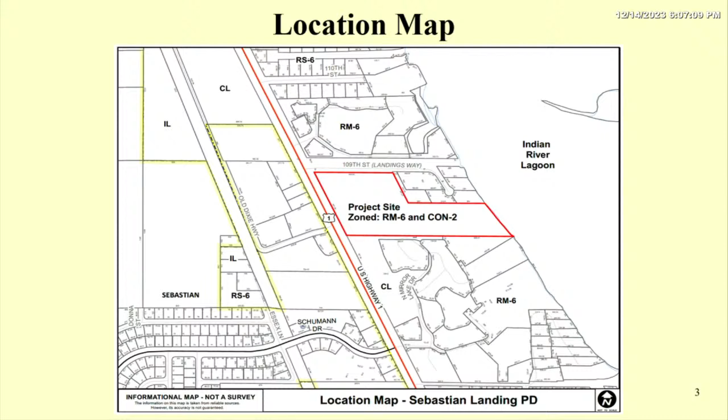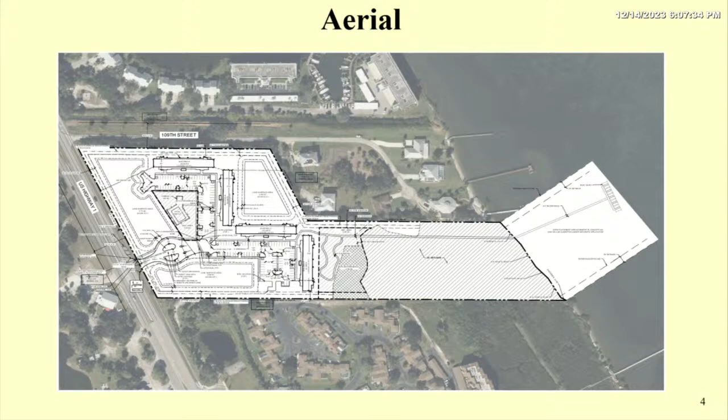The aerial map shows the site superimposed on the vacant parcel, how it integrates with existing development around all of its sides. Directly to the north is the River Run condos on the north side of 109th Street. Adjacent to the site to the north is the Dales Landing subdivision. Abutting to the south is Reflections on the River condo, and again, US 1 abuts the site to the west.

Site plan shows the site. The red boxes are the 4 buildings. Each one of these buildings is 3 stories tall. They each contain 18 units for a total of 72 units. And then the parking is all out in front of each building for access.

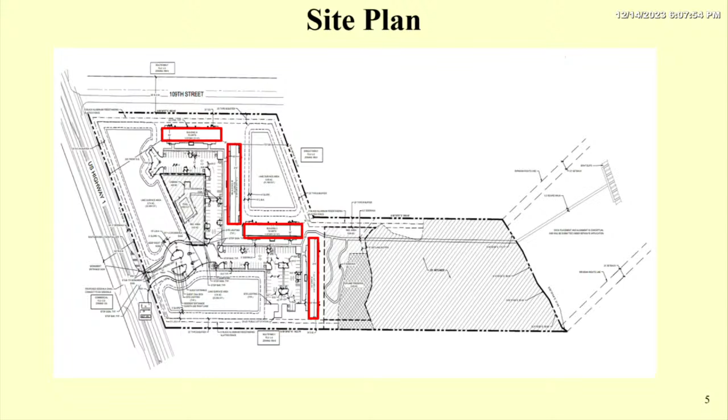Traffic circulation: when you come into the site, the residents can go straight through the center. It's going to be a gated community. They're all going to have their own codes to get in. On the very south side, or to the right, is your guest entrance. You can call in and get in. And then, of course, on the north side, that's the exit lane that all folks can go through.

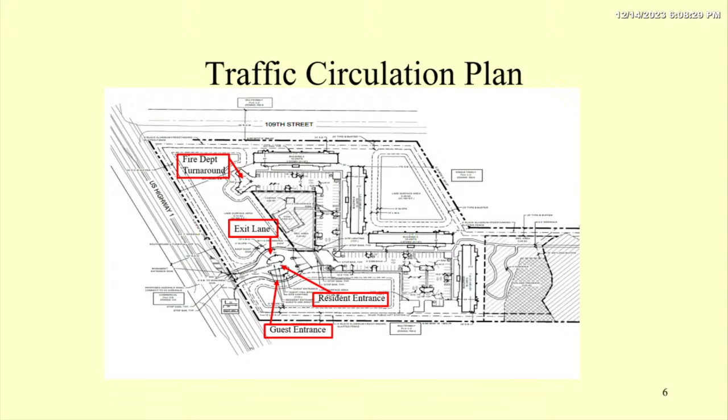To the north of the site, you'll see a little T shape. That's the fire department turnaround in case of emergency access. This is a 2-lane driveway that goes all throughout the site and circles throughout, and it meets all of the parking regulations and width requirements for maneuverability.

Stormwater plan: there are 3 interconnected ponds. You'll see them shaded in blue, connected by underground pipes. They flow to a drainage outfall that dumps into the existing wetlands. There's approximately 4.5 acres that make up that wetland basin. It will help to rehydrate it, and it'll also continue to filtrate it as it comes through.

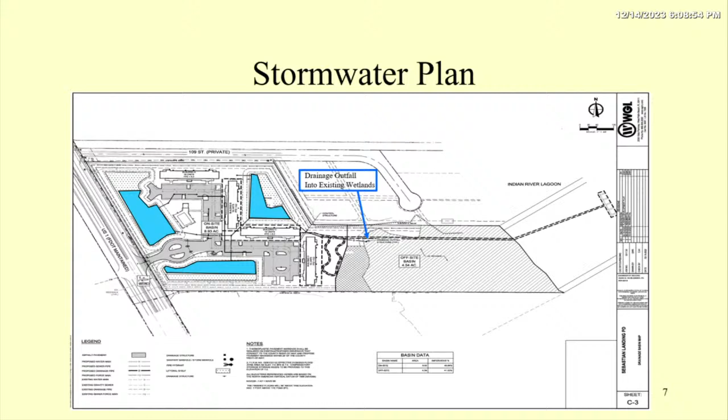The landscape plan: in green is their 25-foot type B buffer with a 6-foot opaque feature. It rings the site on the west, north, and south sides. It doesn't continue all the way because the wetlands are being left completely intact and wooded. They do have a very thick existing tree canopy. You'll see just to the west of the wetlands, that's all being kept, and there's a little pedestrian path that cuts through there. All of the ponds will have lake shoreline trees and littoral shelves within them to help filtrate nutrients.

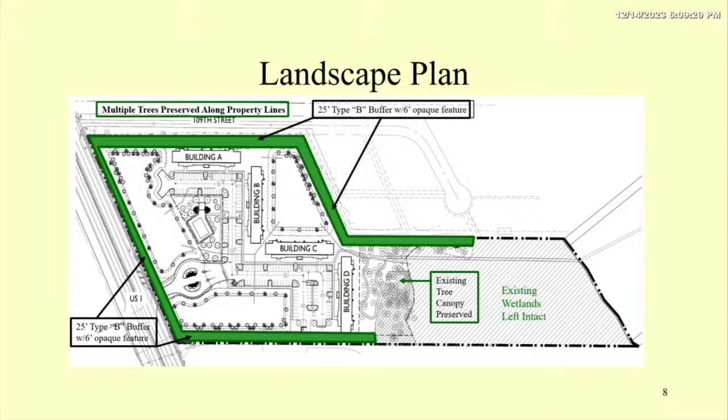With that, the staff recommendation is for PZC to approve the preliminary PD plan plat for Sebastian Landing PD with conditions listed in the staff report related to deed restrictions and/or easements required that restrict development within the environmentally sensitive areas on-site and off-site.

The purpose of this is that density has been transferred from the on-site wetland to the upland portion of the site. There's also density that's been transferred from an off-site bank of 11 acres that was transferred to this property. They will need to record either an easement or deed restrictions that restrict development on those properties. They won't be able to develop any type of residential on them because all of that density has been transferred to the upland portion of this property.

The conservation easements for on-site wetlands and uplands must be left intact. Final landscape, sidewalk, pedestrian system, and street lighting design must be approved as part of the LDP. Final tree protection and mitigation plans also must be approved by the LDP. And then the installation and construction of required improvements is also a condition.

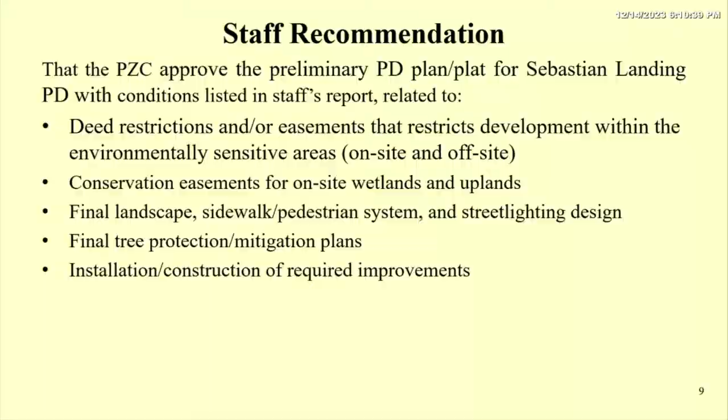With that, we'd be happy to answer any questions the commission may have, and the applicant's representatives are in attendance. Any questions? If I may, sorry.

Mr. Landers, thank you. Not a question, but just a quick comment. Susan Prado, Deputy County Attorney, for the record.

I did, in reviewing this, note something that was not able to be changed due to the time constraints. However, on the actual report itself on page 3, it addresses some of the environmental issues, mainly the conservation easements, which is the native uplands, and the conservation easement for the wetlands.

I will note that while this report says the easements can be granted prior to or via the project's final plat, our code actually does require that the establishment of the conservation easement shall be required prior to the plat, not on the plat. So there will be a separate conservation easement document required before you can get the land development plan or land development order.

There is a conservation easement template that is accepted by the county attorney's office. I just wanted to put that out there before we got further down the road of platting and someone had a question about that particular issue, but that's all.

No other questions? Any questions of the applicant? None? We'll open the public hearing and ask the secretary to swear in all witnesses collectively, please.

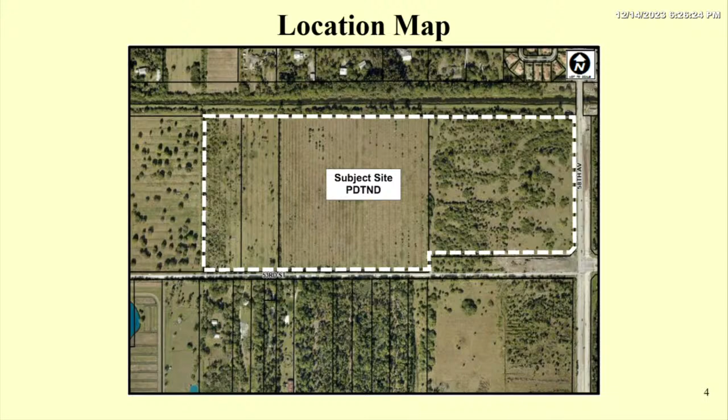They were very similar projects in that they were both PDTNDs, with mixed-use residential and commercial. Tonight is mostly just the residential portion of the development. This is an aerial view, just to give you an idea of how this will overlay with the existing conditions on site.

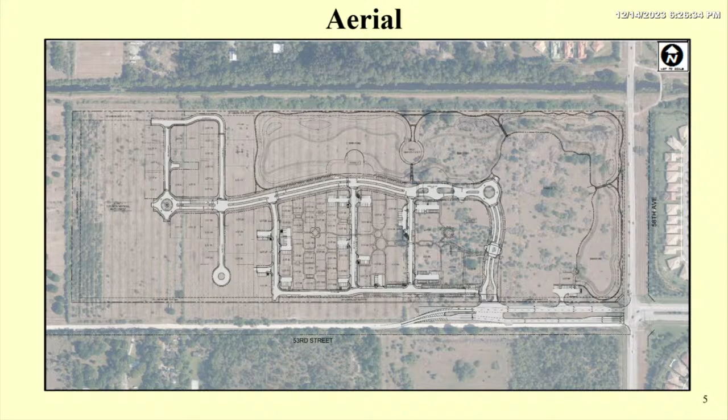The overall conceptual PD plan will be a 2-phase project. Everything you see in blue will be phase 2 and will not be subject of any approval tonight. Everything in gray and white is considered phase 1 of this project.

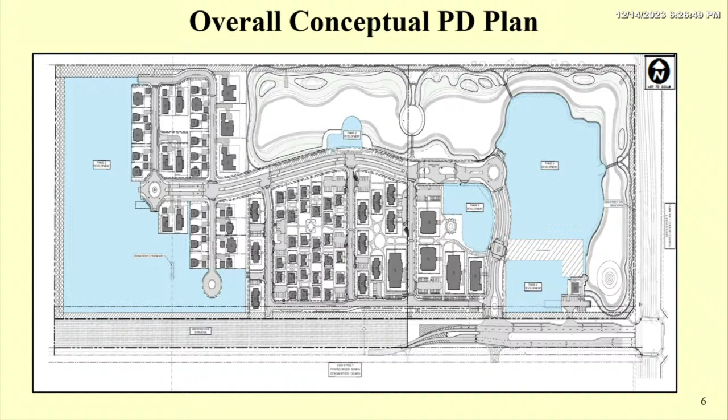Phase 1 will commence the 168 residential units. There will be 2 mixed-use buildings with office, retail, and residential. Most of the amenity and recreation areas will be in phase 1, with additional amenity and recreation areas in phase 2. All the stormwater areas will be part of this phase, along with the landscape buffers and any associated site improvements.

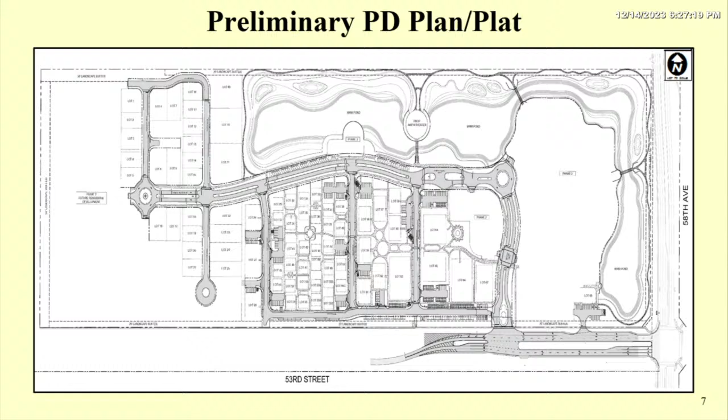The preliminary stormwater plan calls for the stormwater ponds to mostly be located on the north and eastern side of the development. These ponds will carry all of the stormwater runoff for both this site and the 53rd Street improvements, which is part of one of the public benefits being requested tonight.

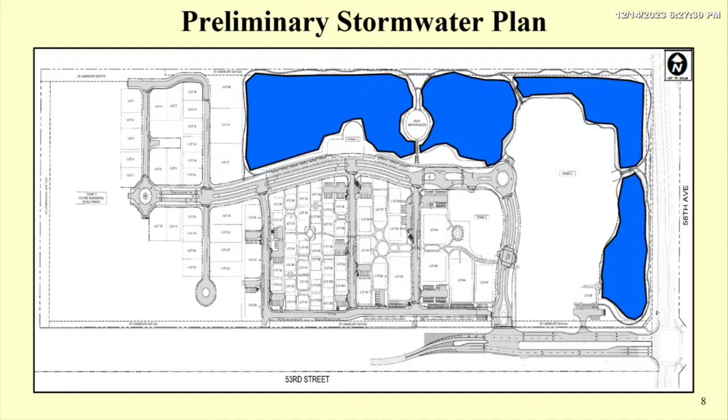The traffic circulation plan calls for a right-in, right-out connection to 53rd Street. Down at the bottom southeastern portion of the corner is where one of the mixed-use buildings will be. Eventually it will connect into the internal portion of the development with phase 2, but for now it'll just be right-in, right-out only, kind of separated from the majority of the project.

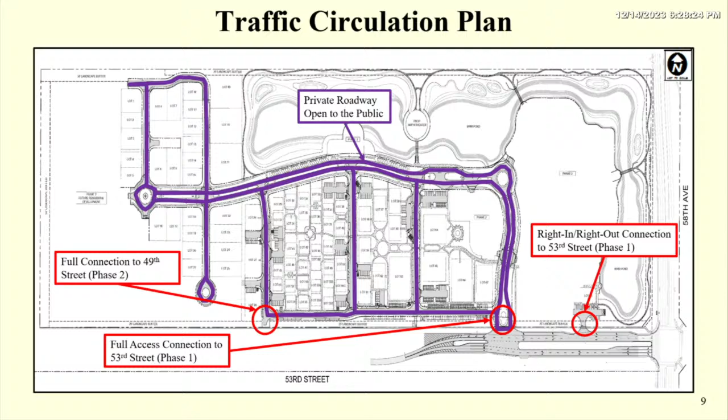You also have your full access connection to 53rd Street, and then a future connection to 49th Street which will connect to 53rd Street in phase 2 of the project. Eventually in phase 2 there will be another connection to 53rd Street, for a total of 3 connections to 53rd Street.

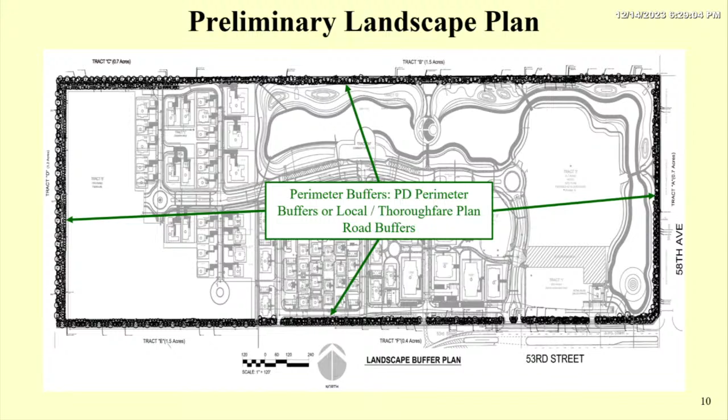Finally, the preliminary landscape plan calls for our PD plan buffers, a 50-foot buffer on portions of the south and north of the site, and a continuous 50-foot landscape buffer on the western part since this abuts agricultural land, which is required by our PD perimeter. Along the entire eastern side and most of the northern and southern sides, you'll have the standard 20-foot thoroughfare landscape buffer required for developments abutting major roadways.

Regarding dedication improvements and conditions: we'll have some right-of-way dedications. For 53rd Street, 120 feet along the southern segment, approximately 2,000 feet. As part of the conceptual PD plan process, another 120-foot segment was already dedicated to the county, so this is just the remaining portion that needs to be dedicated.

For 58th Avenue, the final width for that right-of-way determination will be determined through the final survey and design work coordinated through engineering and public works.

For roadway paving, part of the developer's agreement allowed for 2 northern lanes on 53rd Street to be extended to the westernmost portion of the Mandala Village PDTND project. Providence Point will pick up the southern 2 lanes as part of their development agreement, for a total of 4 lanes, matching what's on the eastern side of the road for the other developments there.

You also have turn lane improvements for 53rd Street: a westbound right turn lane at the project's full access connection, an eastbound left turn lane at that same full access connection, and a westbound right turn lane at the project's right-in, right-out connection to 53rd Street, which is that segmented area that will eventually be married into the project via phase 2.

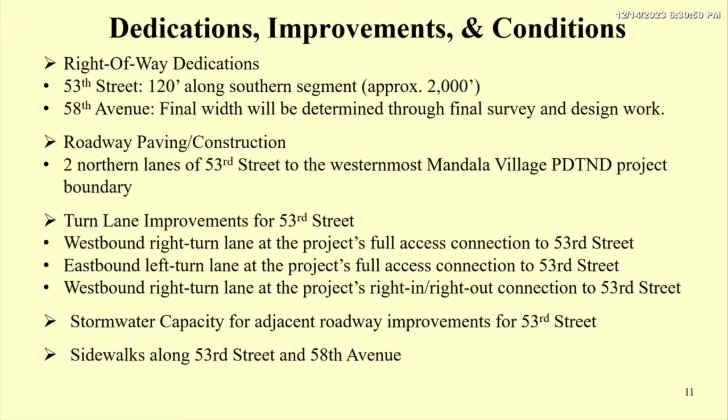The stormwater capacity for the adjacent roadway improvements at 53rd Street is also a dedication within the project. Finally, you have the sidewalks along 53rd Street and 58th Avenue, both required for developments.

Staff recommends that the Planning and Zoning Commission approve the preliminary PD plan and plat for the Mandala Village PDTND Phase 1 with the conditions listed in the staff report. These conditions generally relate to final right-of-way dedications and off-site roadway design and construction, final design for stormwater runoff from adjacent public roadways, final landscaping, street lighting, and tree protection mitigation plans to be approved at the land development permit stage, final design and placement for a transit stop coordinated with the Metropolitan Planning Organization, internal and external sidewalk improvements, installation and construction of any other required improvements, and any dedications prior to or via the final plat.

I'm available for any questions you may have.

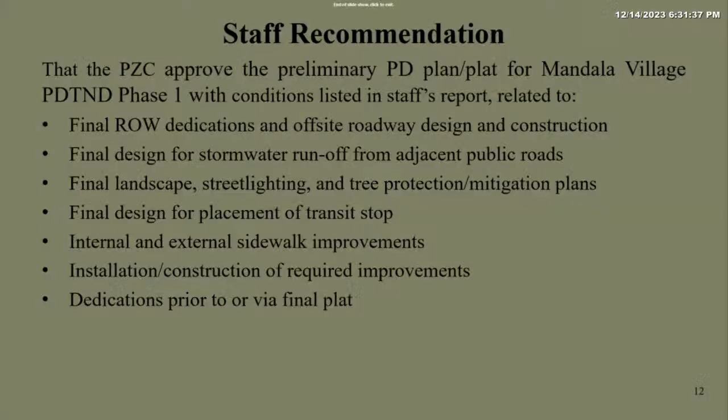Commissioners, question?

Just one question regarding that - you'd have to go back 3 or 4 screens, but I saw that it's a private road with public access. Help me out. You're talking about the full access connection? Private roadway open to the public, yeah, it's listed.

So basically it's my understanding that there are no gates as part of this project. You can see there's a proposed amphitheater on the middle portion of the development - I think this is supposed to be one of the amenities and features of the development. The applicant could at one time decide to come in and gate some sections, but that would have to be done via an administrative approval with the planning department.

And so no gates, and then there is a turn lane on 53rd Street, westbound. Yes. Okay, turn lane. And there's already a light there, if I remember correctly. Yes, it was part of the county's recent improvements - they put a light and extended the intersection. So, yep.

Any other questions? If not, would the applicant like to make a presentation?

Good evening, Wesley Mills with Mills Short and Associates. Thank you for having us tonight. Appreciate Brandon's presentation, it was detailed - I think he went through most of the items associated with this project, so I'm here just to answer any questions you may have.

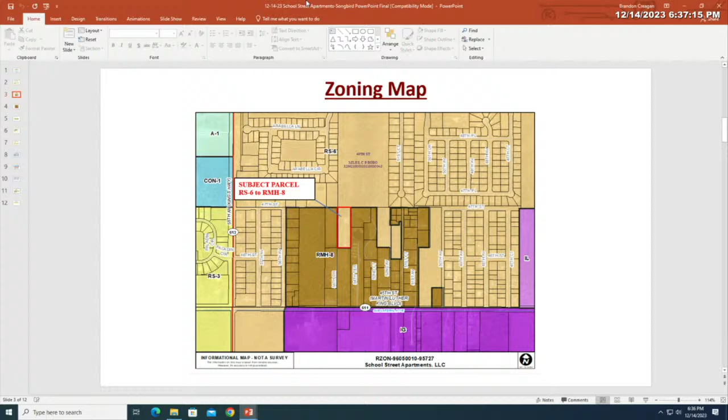As you can see here in the brown, the requested RMH zoning district is established in the area and surrounds the subject property on the east, west, and south. The future land use map shows the area is all consistently designated M2, medium residential 2 with up to 10 units per acre.

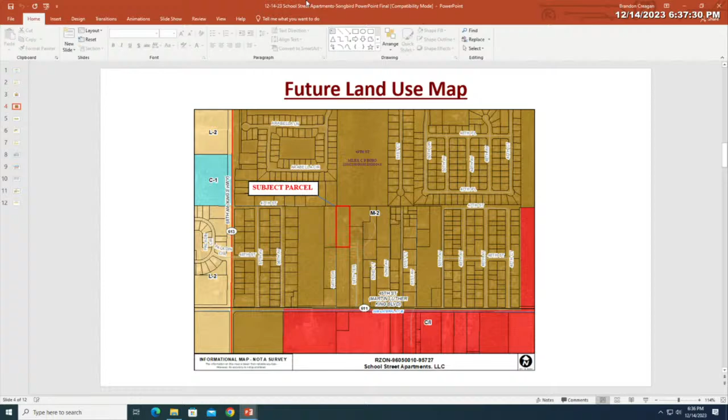We'll take a look at the existing zoning district. The RS6 district is a single-family zoning district. Uses are designated for residential use, providing for single-family housing opportunities, ensuring adequate public facilities to meet the needs of residents. When we compare the existing zoning district with the proposed RMH district, we can see the different minimum lot sizes, width, the density, the setback, and minimum open space.

And then we go to what's proposed. We have the RMH8, a mobile home zoning district, but it's also designated for residential, providing mobile home opportunities, but also ensuring adequate public facilities to meet the housing needs of residents.

Again, we go back and see that the future land use designation is consistent with the rezoning request. The M2 future land use designation is intended to provide for areas with development of residential uses with densities up to 10. The RMH8 zoning classification will limit the density to 8 units per acre, not the 10. Did want to point that out.

As part of your responsibility as the Planning and Zoning Commission, we have criteria that we have to look at under section or chapter 902.12, subsection 3, items A through K, and these must be reviewed whether or not the proposal amendment meets the criteria in A through K.

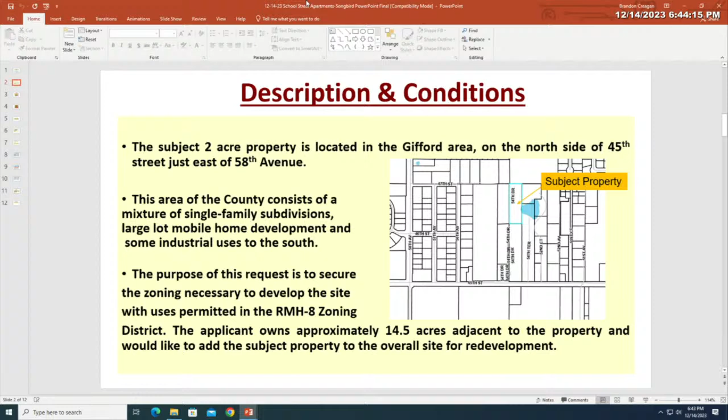And the concurrency is subject to review? Yes, it's subject to review, and it will be examined again, but it was looked at by our traffic concurrency, and everything will be reviewed again during the land development site plan process. I know there's some other things going on along the street there as well.

Would the applicant like to make a presentation? Hi, Jeff Marquette with Schulke, Bittle and Stoddard. I'm here with the owners tonight. Don't really have anything additional to add, but happy to try to answer any questions if you have them.

Questions? What would be the total number of mobile homes available, assuming all this, the existing piece plus this piece? I don't know. The total applicant-owned property, if this passes to RMH8, is I think 15, 16 acres, so whatever that multiplies out, I'm not sure.

Up to 8 units an acre then? Yes, sir, 120, which you never get, but yes. Drainage and roads and everything else through there. But some affordable housing too, which would be nice. No other questions? Thank you.

At this time, I'd like to open the public hearing. If the secretary will swear in any witnesses that would like to speak, anyone would like to speak? Do you swear or affirm to tell the truth, the whole truth, and nothing but the truth? Any comments or questions from the public? If not, I will go ahead and see if there's any other questions for staff. I will close the public hearing.